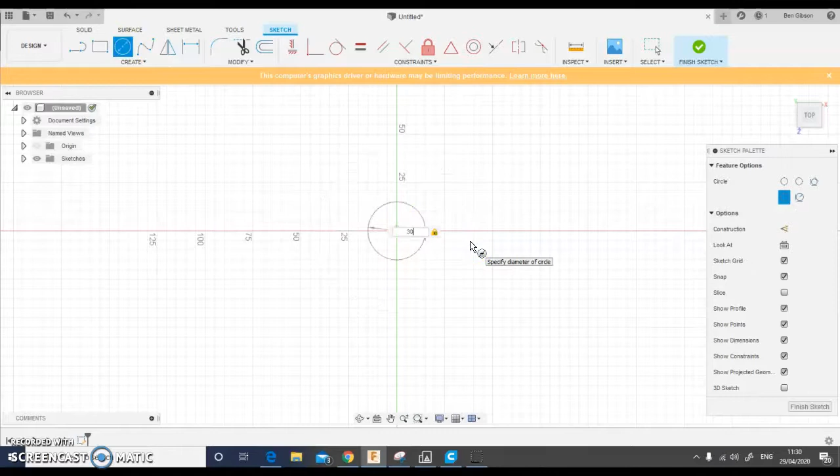So we're going to start by creating a sketch, and I want to sketch on the horizontal plane. And we're going to use center diameter circle off the origin and enter 30mm diameter. And we'll take another center diameter circle off the same point and enter 38mm diameter. And that will give us a ring, 4mm wall thickness, so we can finish that sketch.

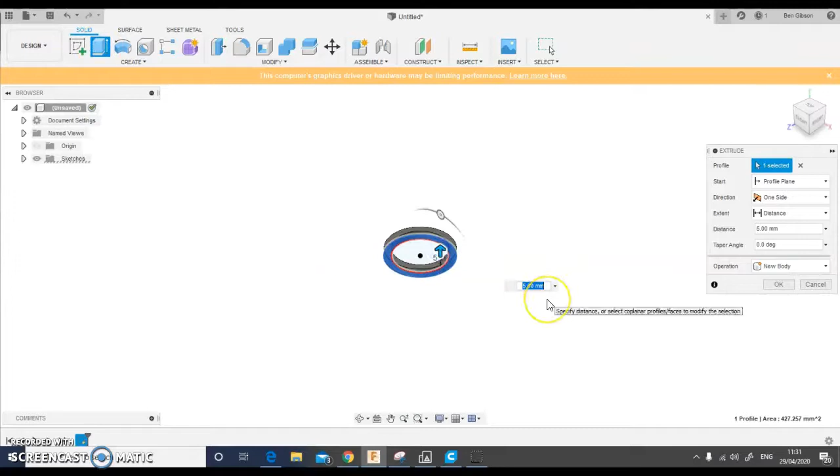Now we want to extrude that ring, so we use the extrude tool, select the ring, and enter an extrusion distance of 3mm. Now we want to build some features onto this ring, so the next sketch I'm going to produce will be onto that ring surface. So I create sketch and then select the top surface of that ring to sketch onto.

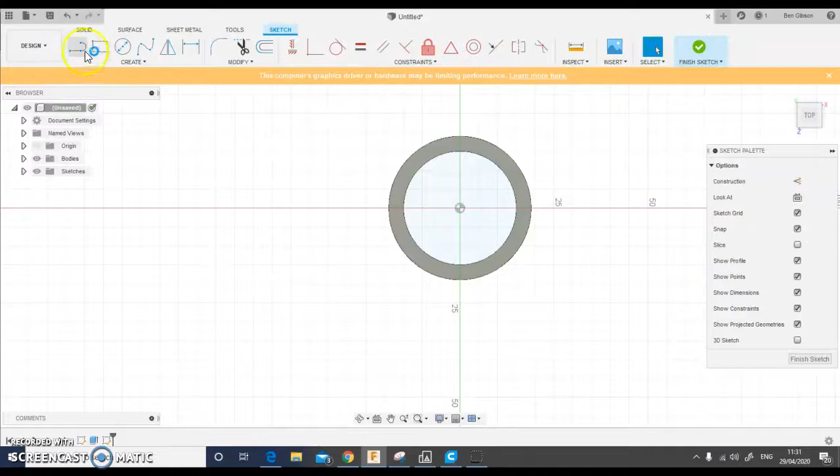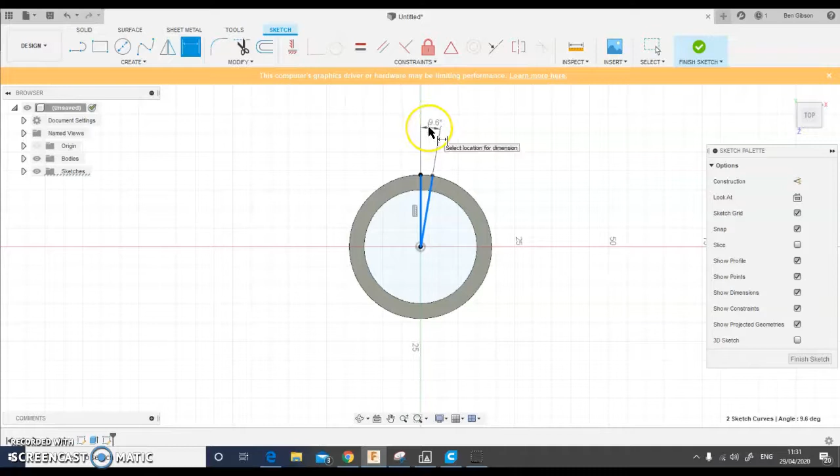And we're going to use the line tool to produce some radial lines off the origin. So we'll have one vertical and we'll have another somewhere close to it. And we can use the sketch dimension to select both of those radiuses and drag out an angle dimension and enter an angle of 5 degrees

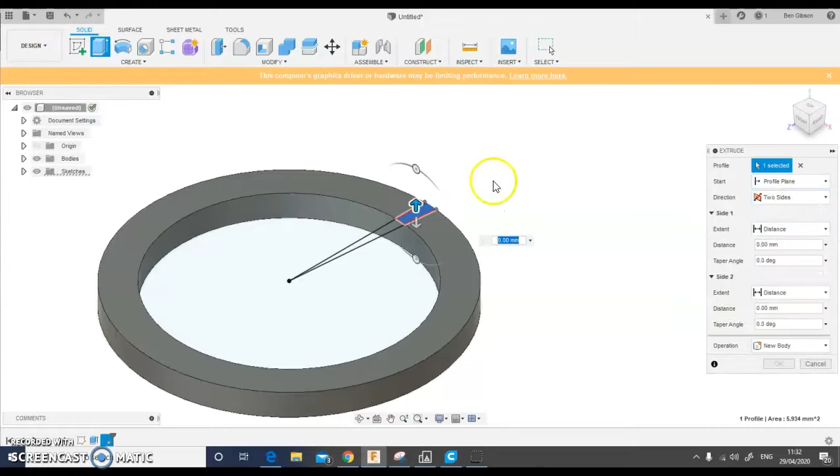and finish sketch. So the next thing we want to do is extrude that small area here, so we can select extrude and select the area that we want to extrude. We want to extrude upwards and downwards, so in this direction drop down we can select two sides. So upwards we want to just extrude 3mm, but we want the same feature on the bottom of this ring, so we need to extrude downwards the 3mm, that's the thickness of the ring, plus the 3mm of the feature. So we'll go for

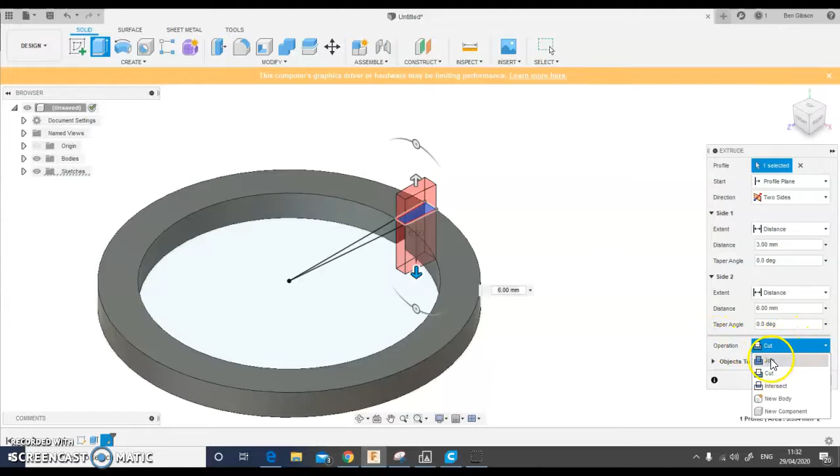6mm extrude. Now Fusion thinks that we want to cut extrude this, thinks we want to cut a hole in the part, so we need to tell it in operation here that we want to join our feature to our part. Okay, so that looks good, we can OK it. And we have one new feature. Now that looks a little bit harsh to me for a bubble wand, so I just want to soften the feature up a little bit.

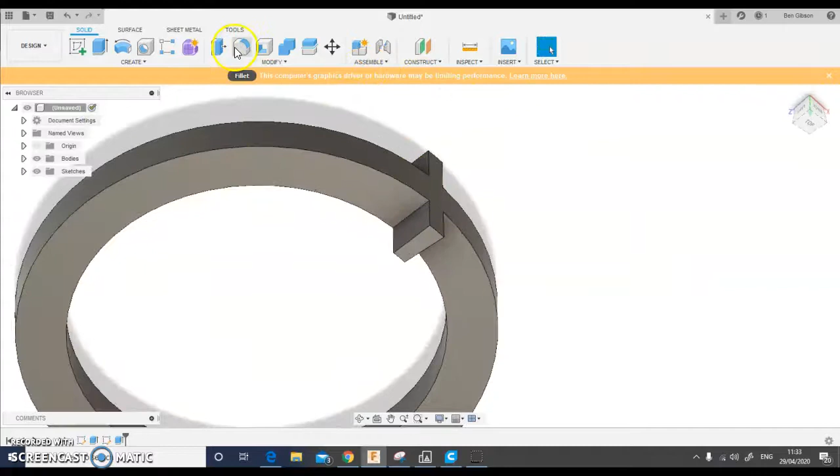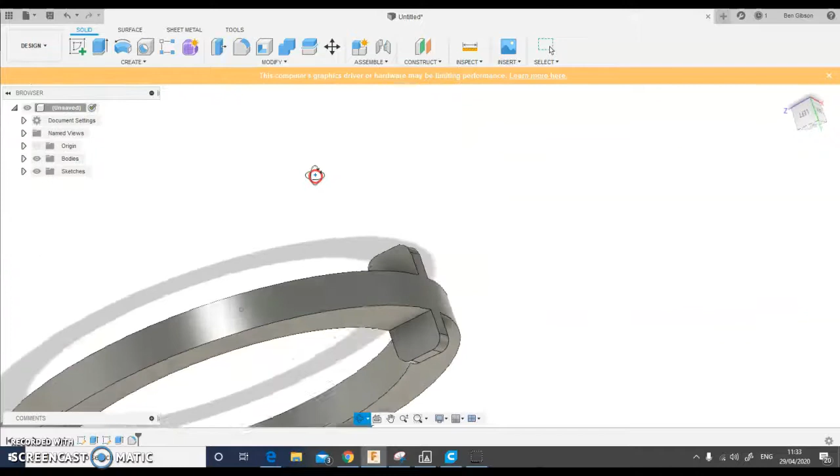So we'll use the radial tool or fillet tool and select 1, 2, 3, 4 edges and apply a fillet of 1mm. Okay, so that looks a little bit more like it.

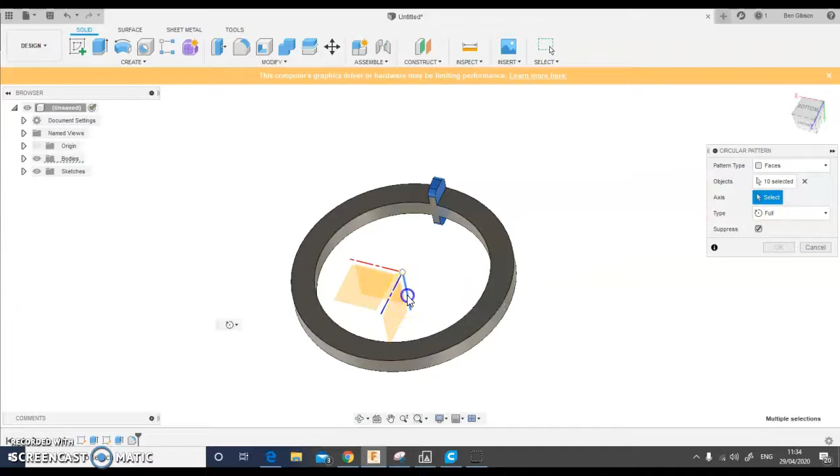So the next thing we want to do is we want to repeat that feature all the way around this ring. So we can select the feature using a selection box and then use pattern tool and circular pattern. So we've got our 10 objects selected. We need to select the axis that we want to rotate around. So we're going to select that vertical axis, and we're going to say we want 36 copies of that feature. Okay. And that completes the head of the bubble wand.

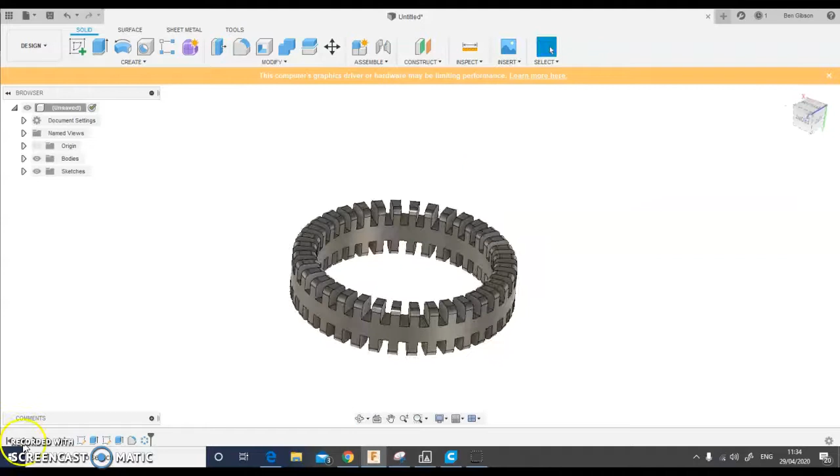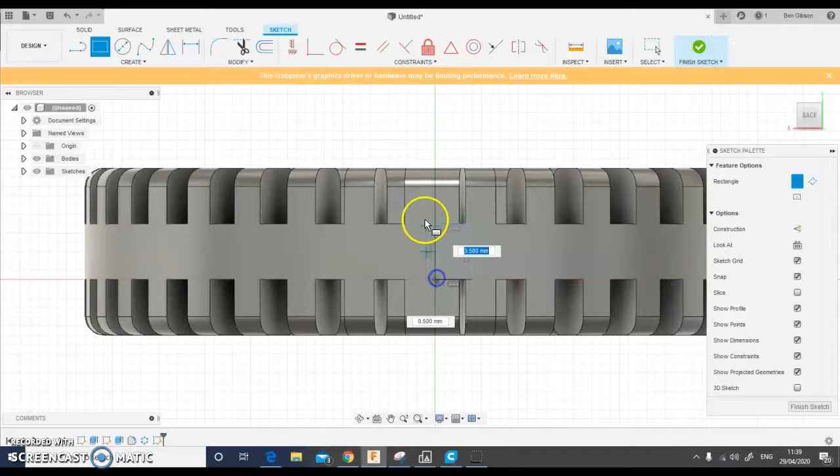So the next feature we need to produce is the arm of the bubble wand. So we can create a sketch and select the vertical plane this time. Now we need to make sure that we're making this feature symmetrical across this axis here. So I think the best way is to use 2-point rectangles off the origin. And we'll extrude both of those rectangles to be 3mm high and 2mm wide. So there's one, and there's another one, 3mm high, 2mm wide.

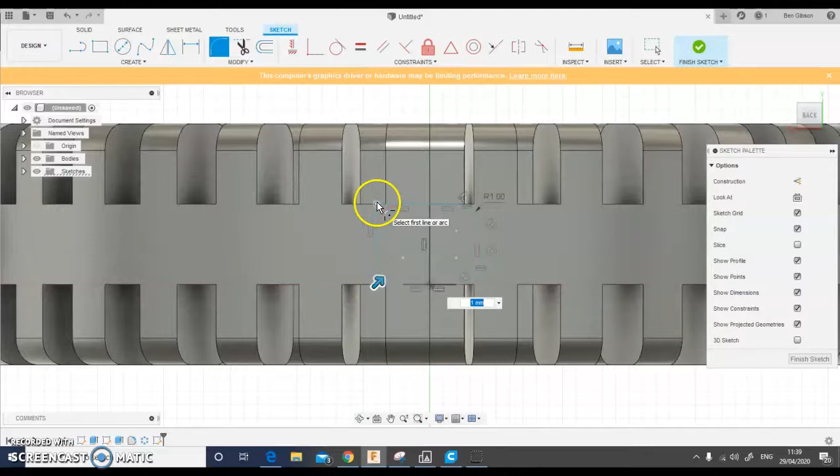But we want to soften the handle a little bit, so we'll stick a couple of fillets in the corners. So if we apply a fillet at say 1mm in each of those corners, that looks fine to me, so we can finish that sketch. Let's have a look at what we've got.

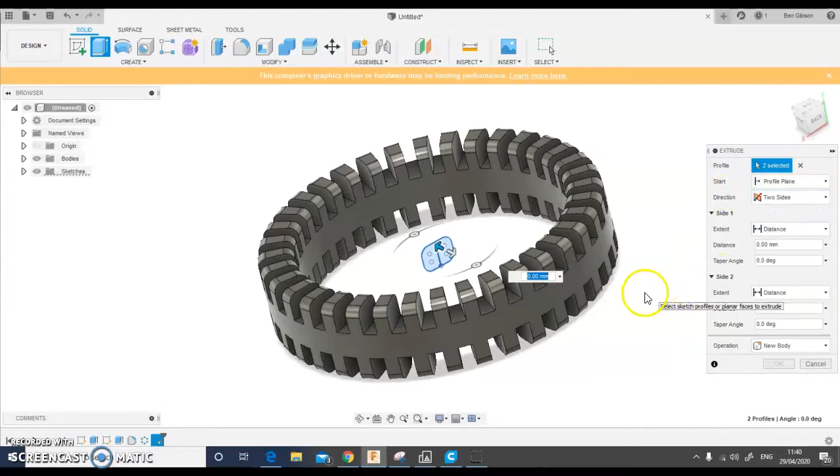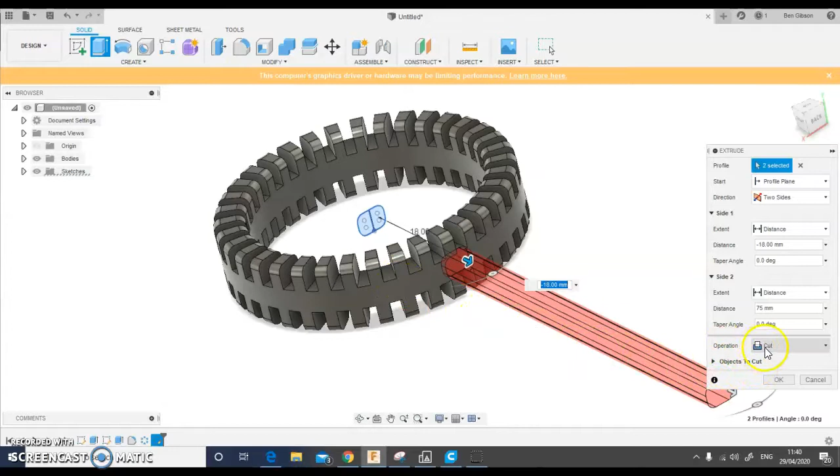Okay, so to produce the arm we want to extrude that sketch. Use the extrude tool, select both of those areas, and then again we need to, in the direction drop down, go to two sides. So let's extrude the first one by 75mm, and what we want to do with this end is just drag it until that end sits within the thickness of the head of the bubble wand. Again, it's defaulted to operation cut, so we want to tell it to join those two parts. Check what you've got. I like it. Hit OK.

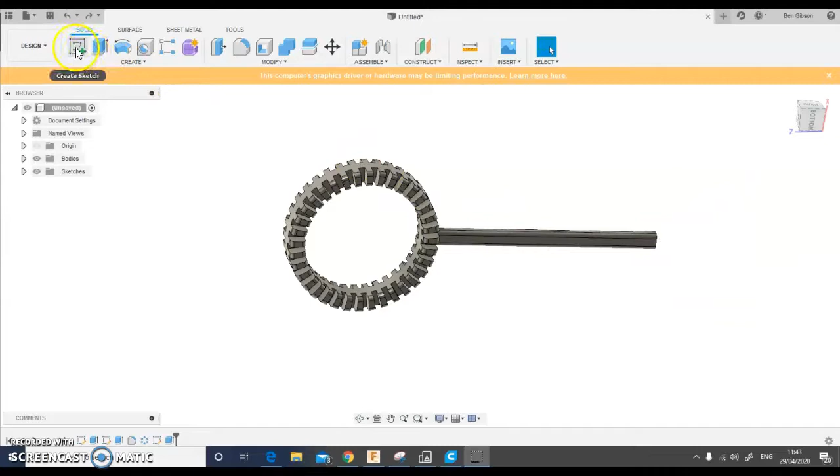So the last part of this model is the handle. So we need to create a new sketch, and of course we want to sketch on the horizontal axis, and I think we'll go for an elliptical handle. So if we use the create drop down and choose an ellipse, I don't want to give you dimensions on this, you can make this up as you go along.

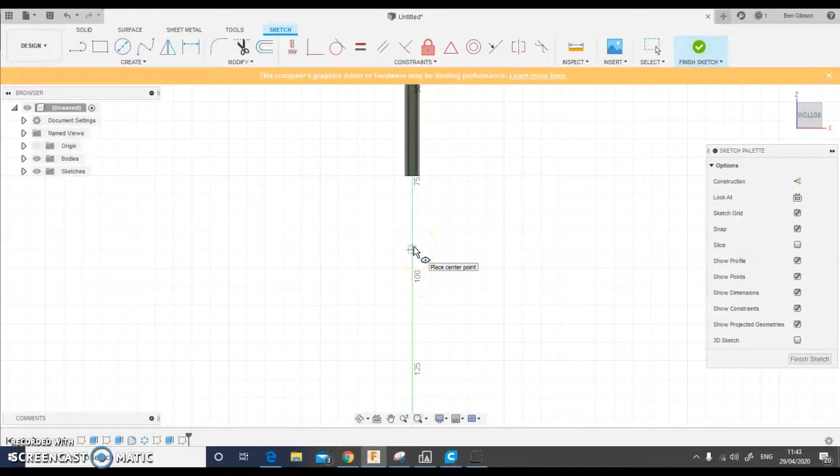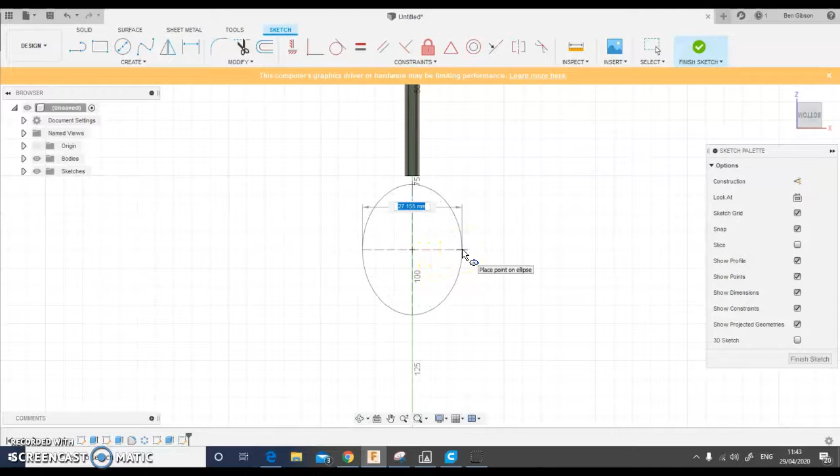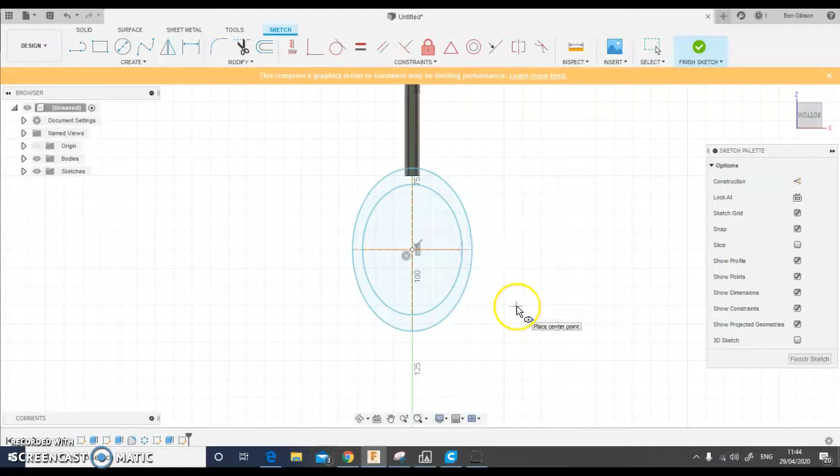So the first click is to select the centre of the ellipse, and our first ellipse I'm going to just take it just shy of the end of that handle, and that's the major axis, and then we want to go not quite round, and that's the minor axis. Okay, and then we can repeat that, and this time we want to go just past the end of the handle on the major axis, and maybe make it not quite an even wall thickness, gives it a little bit of extra. Okay, so if you're happy with that, you can finish sketch,

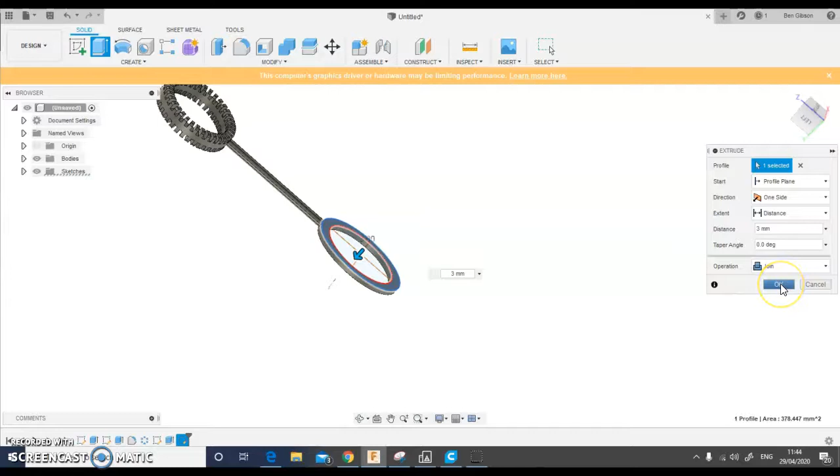and of course we want to extrude that, so we use the extrude tool and extrude in the downward direction 3mm. Operation join. Okay, so I quite like that.

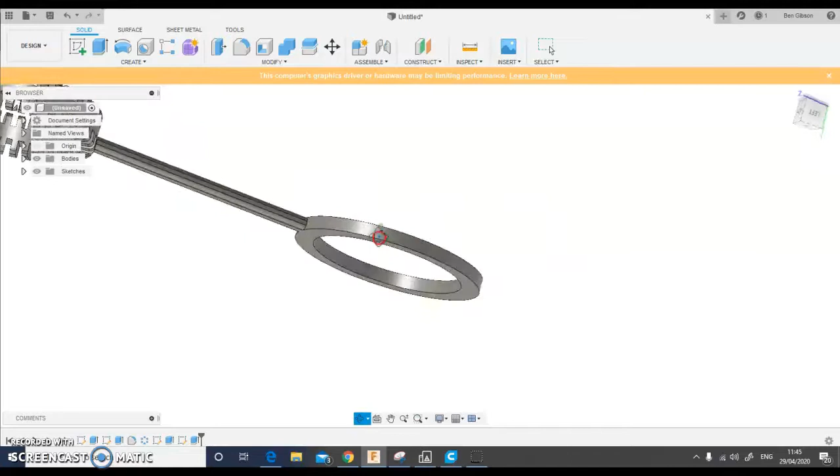I would be tempted in the CAD model to put a radius around this edge and this edge, soften it up to match the handle, but I'm going to 3D print this part, and we're going to get a cleaner print if I leave that with sharp corners. So it's up to you. You could apply fillet to all those edges on the handle if you prefer.